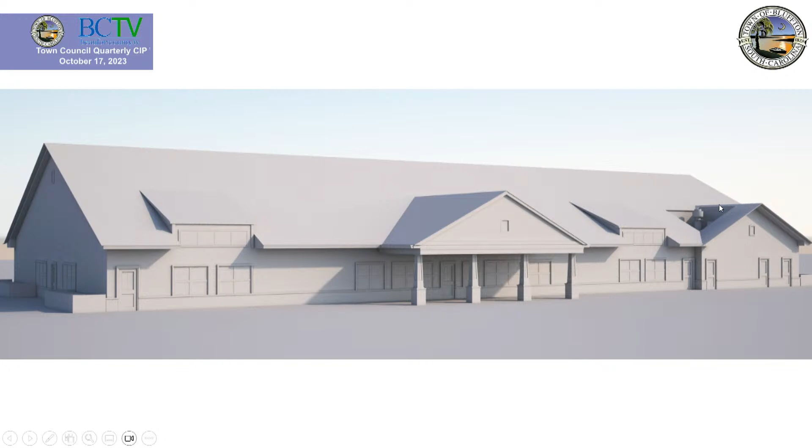They have addressed a lot of those concerns. These are the renderings they provided so you had an idea of what it was looking like. This is the area, this is the front, so this space is Highway 170. They have inset mechanical equipment into the roofline of this gable here, and this is the view from the other direction, so that hood equipment is in this area right here is how that's being proposed.

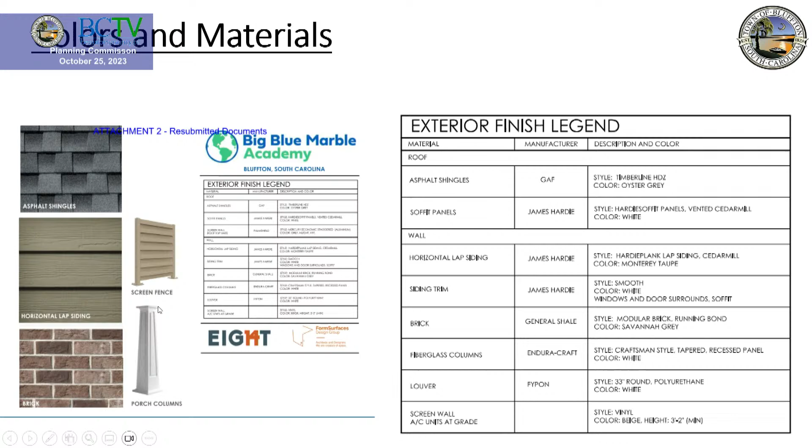This screen fence is what is being proposed with the HVAC units. There's a steel fence that is a little further in the details here, which is the one that you see wrapping around the rest of the property here.

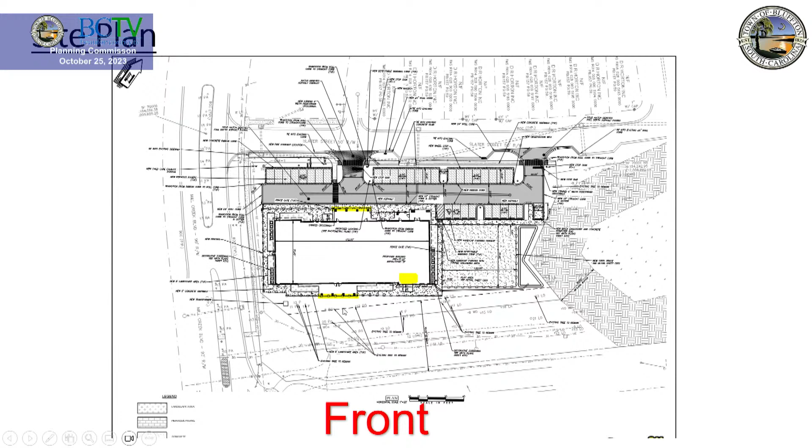They've cleared up the circulation challenge that was at this corner with the pinch point, so it has been pulled away from that corner. I did highlight the two areas where it still is up against the front of those columns. The narrative had it as being pulled off that, but I think it was just an oversight, it has not yet been pulled off. There is space to do so, so it's not a concern to pull it off the front as a condition of the approval. However, it is still touching the column based on this version of it.

Hopefully it won't create the challenge that I see on Buckwalter Parkway every single morning of the world when I'm running late to work.

They have changed the size of the plantings that are in front of the transformer here, raised those in height some, and they've changed where the sidewalk is, so those pokey things that were going to poison little ones are no longer pokey and poison next to a sidewalk, so they have modified that as well.

They did remove the pedestrian door here so that it's just a front entrance on the dumpster, which means you won't have the conflict with the door there.

However, Mr. Brock did bring up to my attention that this is a rather small area for that large canopy tree with the dumpster, which will be an overhead dump and may cause problems there, so they may need to think about the location of that tree. It does need to have a tree because it is a landscape island, it is a requirement to have said tree. So that may just need to be adjusted a bit in order to reflect that.

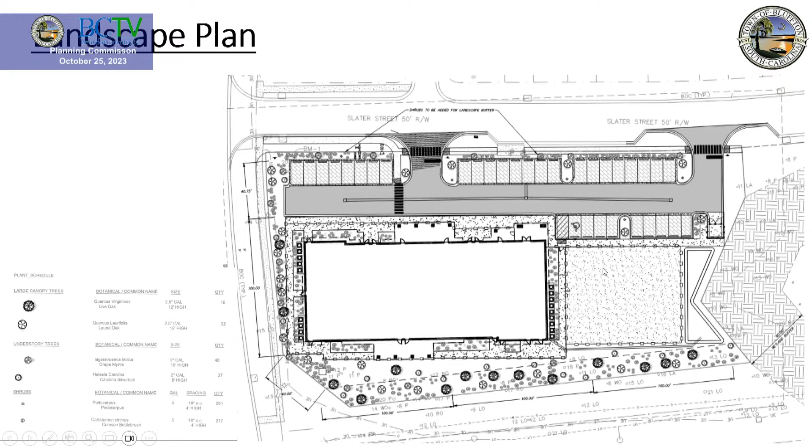The lighting plan had no changes made to it. However, changes to the landscape plan meant the lighting plan no longer has the same issues it had previously, because the conflict was with landscaping and lighting at the same time. Their numbers are still fine, and the location of their lights is no longer in conflict with the trees.

The two items I still need are: one, the Planning Commission make a determination on the appropriateness of the use of LED lights, because they are not permitted by our code. This is something we see all the time.

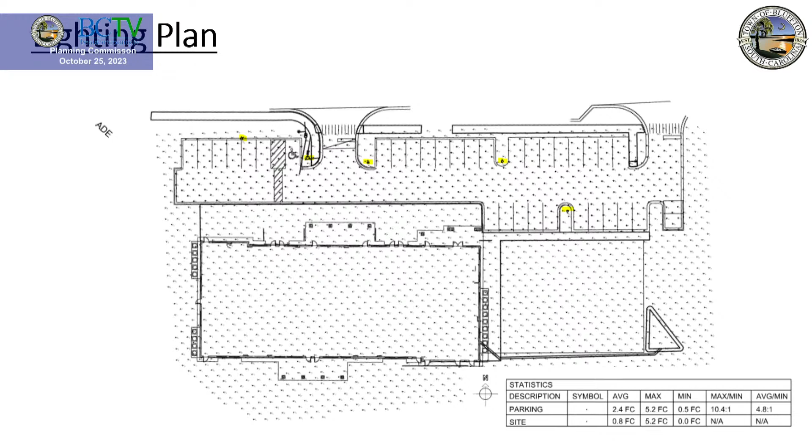And the other item is that information regarding it being a full cutoff fixture is not listed clearly, at least in the information we received with the submittal. So information on it being a full cutoff, to ensure it won't be a problem to the residential property behind it and that it meets the requirements of the ordinance, are the two lighting challenges still being faced.

So this is just an up close view of that. I went through all of these. This is a little hard to read, it's a little hard to read on the submittal version as well, but I can zoom in better when looking at it on the full screen. So just something to ensure these are full cutoffs. Otherwise, there's no issue with that.

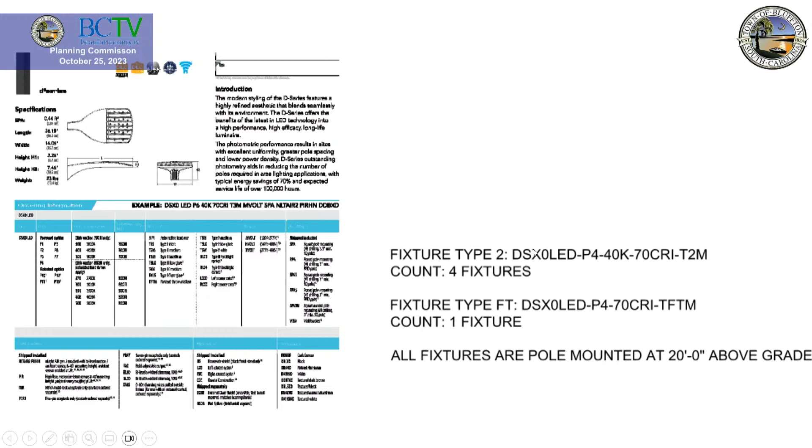Are you all still following? Good deal. I'm going really fast.

With this being a certificate of appropriateness, the applicable review criteria are those set forth in section 3.17.3 of our Unified Development Ordinance, requiring compliance with Article 5 design standards. However, because this is located in the Jones Estate and not within the Unified Development Ordinance regulated document, that is not applicable. So it must comply with the development agreement, PUD concept plan, PUD master plan, subdivision, and any other regulating documents, which would include the development plan.

The application must also comply with the application's manual, and it is in compliance with that. Design Article 5 doesn't apply. It is, for the most part, in compliance with all of the development agreement, concept plan, and master plan, with a few small exceptions I will bring to your attention in a moment.

The HPC has the authority to approve the application as submitted, approve the application... yeah, did I say HPC? I'm so sorry, the HPC has no authority whatsoever over this application.

The Planning Commission has the authority to approve this application as submitted by the applicant, approve the application with conditions, or deny the application as submitted. With the permission of the applicant, the option to table is also available.

The applicant provided me a little more information at 9:44 p.m. last night. Their architects were working overtime after we had a phone conversation about some of these items. We were playing phone tag for a minute.

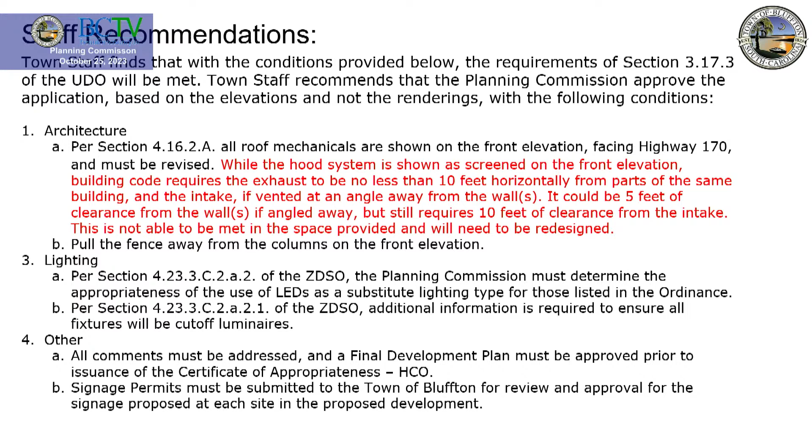So the two items that are design forward are the hood system and the fence on the front elevation. I put a whole slide in here for it.

The applicant is here to speak on behalf of the project. Samantha is here, and so is Matt from Cranston, and they can answer some of the questions you may have as it relates to this.

What's been modified here is that the roof line has been pulled back down from a 6 and 12, from a 4 to a 6, now it's 5. The reason for doing so was to lower the ridge of that roof by about 3 feet, which will make this area a little smaller.

Because when you pull it to 6, it became a very long and blank facade. There was a lot of space above the gables where they walk under, the porch areas. There was a lot of space on the front elevation roof as well.

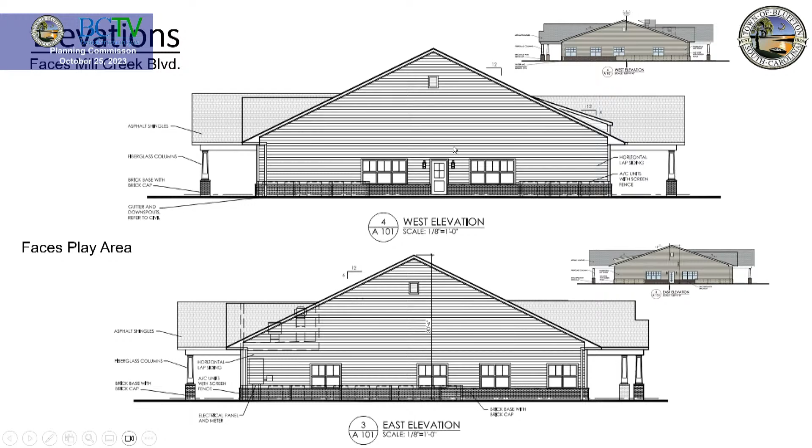That fix took it from 30 feet down to about 27, 26.9, but that was good.

They also changed the dormers to be less than 4 and 12. There's a 3 up there that needs to go back to 4 and 12 in order to meet the requirements here.

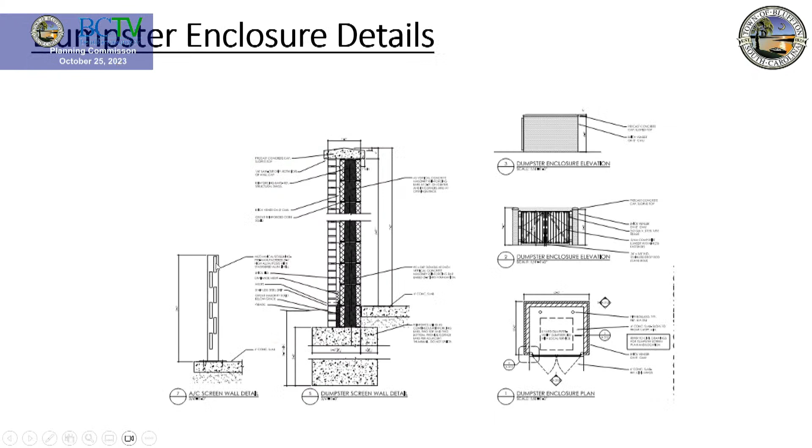And then they added the bracket detail in the gable. It is not touching the sides here like it is on the front elevation, however the intent is to do so. This is a quick mock-up to be able to show us a little bit of something, so that is going to look like this here, but on the other end.

The applicant can speak to a lot of this as well, but I'm walking through some of it here. They moved the kitchen vent to the side elevation, which our ordinance requires not be on the front elevation. This would meet that requirement. It also puts some interest on that side elevation as well.

This is the side that faces the playground. The other side has the door centered between the windows, and they did pull that door back to center, 3.5 inches, just for you, Commissioner Denmark.

This side faces Mill Creek Boulevard, where the bottom side faces towards the playground, and beyond the playground is the wetlands, so there is more of a buffer on that side. Pulling the hood system out to the side is highly preferred to the front elevation, which it cannot be.

And so that is where they've proposed to move that. The makeup air stays up on that roof. That is how it is currently drawn. Exhausting, I will, yes.

We were questioning that. She had made a phone call to the architect in between me coming up here and now. This is supplemental image 3, which shows the makeup air in that front cranny, nook and cranny. It also shows the roof line being brought down.

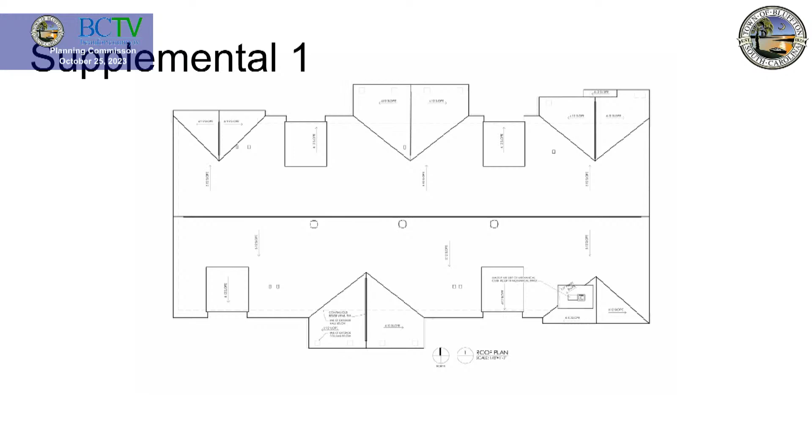While it is not the complete norm for how applications are presented, as this is old business and we're working our way towards something, if the solutions that they have provided as supplemental images, because they got them to me early enough that I could get them in the slide, if you wish to make a motion based on those, I would request that your motion include, as shown in the supplemental images 1, 2, and 3 during the 10/25 meeting, and then any conditions that you may have in addition to those. That would be adequate, in the supplemental images shown during this meeting, for those pictures that I showed you that are not necessarily in the staff report, as this will be included in the minutes.

It's not a biggie, it's just, in your motion, could you go to the motion for a second? The motion is absolutely just a proposed and does not- No, I know, okay. But in one of those we'd have to talk about the 4 and 12 versus the 3 and 12. You haven't added that, right? I have not, because that was just brought to my attention.

And just because it bugs me, because they do it wrong on my projects all of the time, the column and beam alignment, please make sure. That's it. Just found one today, and I got really mad about it. A prominent location, it's not my fault.

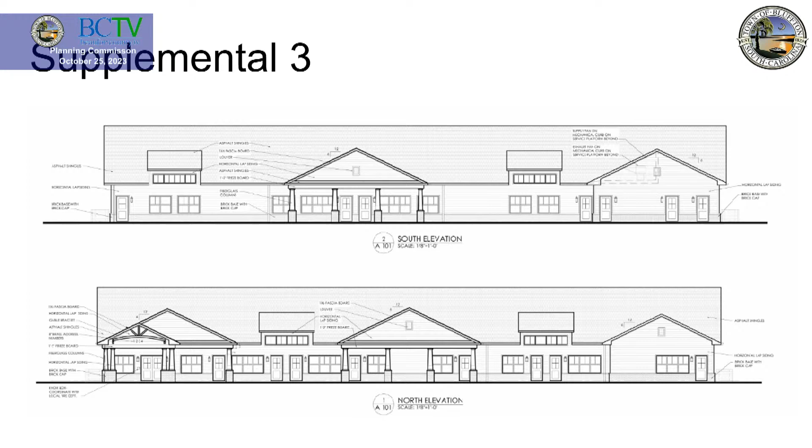I do have a note, just so we don't run into this issue again. Please, applicant, realize that if that makeup air is installed and it's peeking out over that roof, that will not meet the requirements. So make sure, with your curb, with your makeup air, everything is below that front elevation roof line, including the angle that'll be there. I think you've got, I'm in the AC business, I think you've got the room there, but just make sure of it before you build it.

From the front elevation.

Anybody else have any other thoughts while she's still typing that? Go ahead. He's got a whole book over there. Because I know we need to add some things, probably. I have a couple questions. Should we open it up to the applicant before your questions or after your questions, Commissioner DePaul? Is it something that the applicant needs? Is it questions for me or questions for the applicant? Anyone that wants to answer.

Would the applicant like to speak? Okay. Just push it. She'll have better answers. Samantha Kozlowski from 814 Development. Do you need address? No, okay. What's your question on the application? Oh, yes.

So they're currently not shown on the elevations. However, they would need to be shown on the elevations and moved to the side here. Okay, yeah, that shouldn't be an issue. We could make that a condition of approval as well. I don't think that should be any problem.

Question for Katie, maybe - I saw in the staff report something about the meter location. Is the fact that it's not screened fine because it's on the side elevation? Okay, the power company has modified a lot of their regulations as to what they will accept, sorry, I'm getting closer to the mic because it doesn't pick up. So there could be a screen that sits about 3 feet away from it as a single wall, but it still has to be accessible fully, and no gates. They have plantings, so they have a service yard fence in front of it, it's just that the fence is super low. They have changed the rules on us - not the applicant, but electric.

Do you think we can look at that elevation? If you think it needs to be moved up to be more appropriate, you can suggest that. It just seems odd to put a screen in front of it that doesn't conceal it, unless I'm misreading the dashed hidden lines there. I think those are just the condensing units themselves. I don't think it's - this here, it's the electric meter that she's looking at.

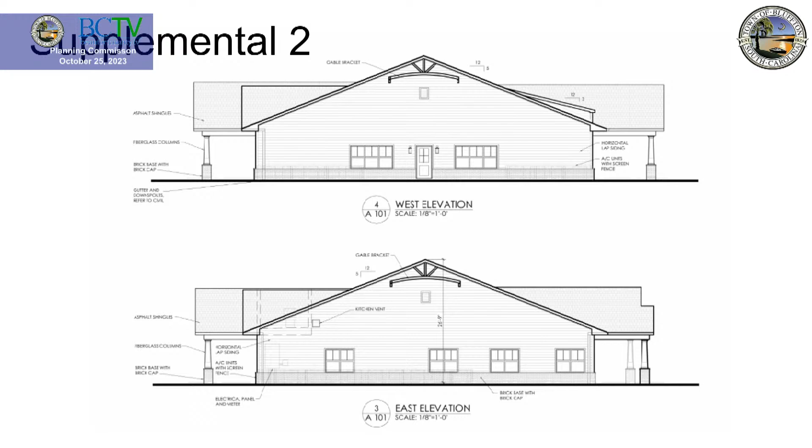Yeah, but there's not like a fence around that, right? I think that it technically is kind of enclosed by the same fence that's fencing in the HVAC units shown there. It should be encompassed within the area, so note that it should provide a little bit of screening.

That's difficult to see. It doesn't really print out very much either. Oh, it's cool - get rid of that fence, that's right at the playground, kids can go wherever they want. It's an invisible fence.

It's this PDF on there, that's really what it is. Well, so we're talking about this here, yeah, but it's really, you can't tell what that is, so. I think she's looking to see what that is. I'm sorry, it's not real there, but we can try here.

It's detail 7 on A312. It's 3'4". So tall kids can still go over it. Tall kids can still get over it, yes. Okay.

If we don't have a requirement, that's fine for the playground. It was just a question, give them extra stuff to do. That's around the condensing unit, but it's on the playground side. Tall kids can still get it.

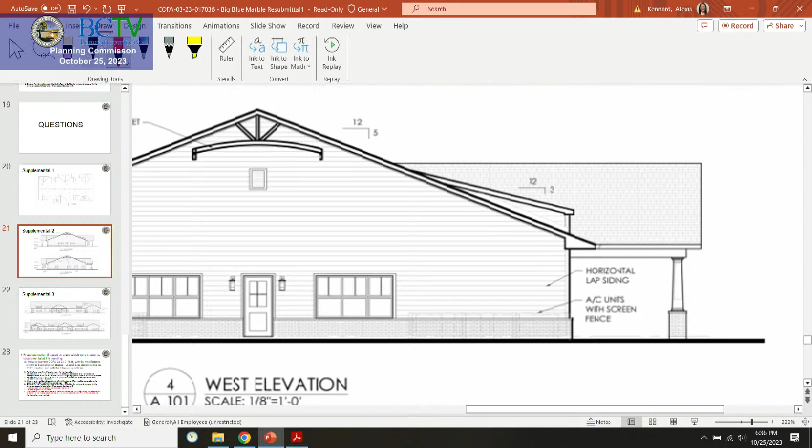Okay, please hold for one more second. You need to do the other line. Sorry.

Nice, can you just tell that's 412? I just moved up to the top and extended. It's not moving. Am I close? No, I've lost it. Yeah, take the angle all the way up to the top, more or less. That's the angle it'll be at, so it will be almost at the top, won't it?

Did you say it was 412 on the other sheets? That's not just a misprint on that sheet, right? It says 412 on that one. On the roof plans it says 412, but... Okay, well, we're not gonna be able to solve that right now. The roof vent still does say 412. Yes it does, but it looks like a 312 though, if you look at it compared to the other ones.

Okay, what other comments do you have? I think that's it, thank you. Jason?